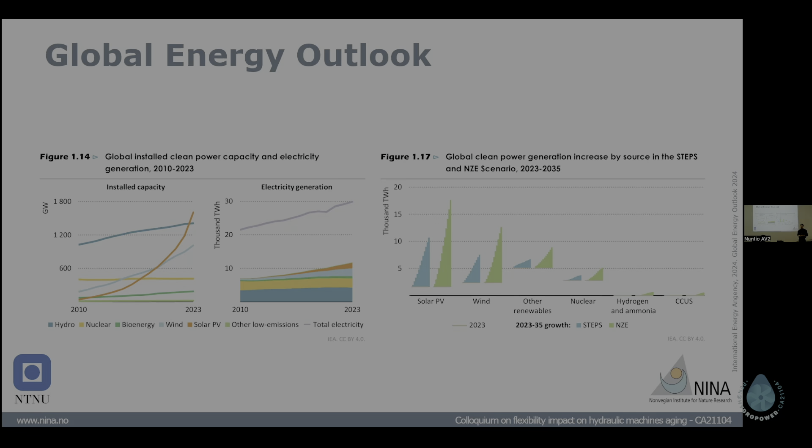I'm really happy to start off because, as a brief background, something that dropped this week is the Global Energy Outlook from the International Energy Agency, which shows that we still see a big increase in wind and solar photovoltaic. The installed capacity is just on the rise. We see that recently solar photovoltaic even overtook hydropower in terms of installed capacity. And we see that this trend will continue - what has been pledged by politicians shows a lot more capacity and energy generation from solar photovoltaic and wind energy in the next years.

That means we have a huge influx of intermittent energy sources, so we need something to stabilize the grid. That, of course, can be done using hydropower. And that just goes right to the point - we will see way more flexible use of hydropower in the upcoming years.

So just briefly about Norway - if you don't know, Norway is very favorable for hydropower. We have huge elevation differences, a lot of precipitation, and solid rock mass, so it's just very nice conditions for hydropower. If we look at the numbers, we see that we still have about 90% of the electricity being generated by hydropower. It used to be even higher, but now wind and solar are pushing the percentage down. Still, it's a large share, and those about 1,800 power plants are distributed across the entire country.

We see a huge number being installed on the west coast, which is even wetter, with annual precipitation reaching up to 2,000 millimeters annually. There's about 34 gigawatts installed capacity, producing about 137 terawatt hours of electricity annually. So this is big - it's the largest hydropower generating country in Europe.

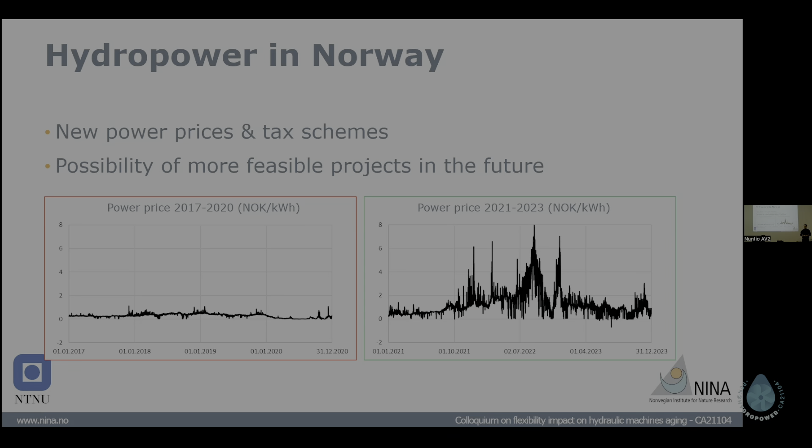You can predict, you can work with this, but you really know, okay, I get this or that power price over the next 10, 20, 30 years. But in recent years, there's been a huge change to that. We see that power prices are skyrocketing, and they are very fluctuating. That means that projects that might not have been economically feasible will be economically feasible in the future due to the increase in electricity prices. So this is interesting. A lot of things are changing on the market.

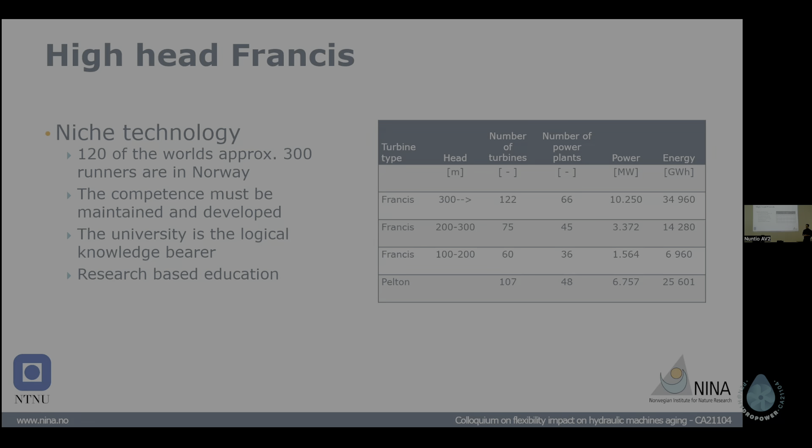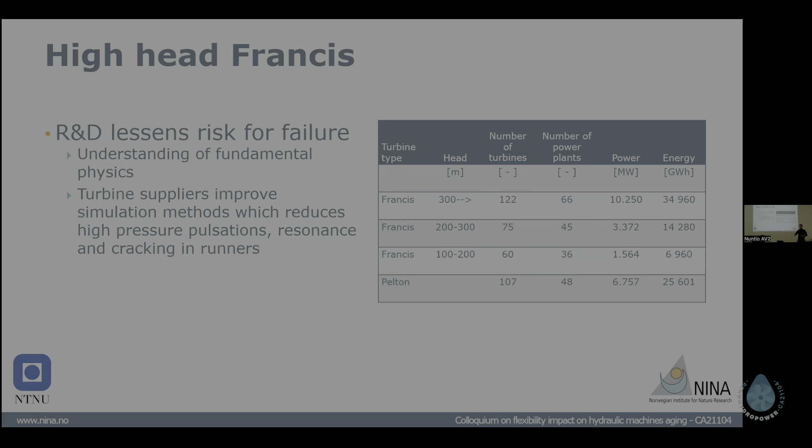And then again, if we approach a more flexible use, this will also mean there is a need for more research, and the research is usually done at the university. In Norway, that means the Norwegian University of Science and Technology in Trondheim, at the water power laboratory where we're sitting. Through this research and development, we can increase the knowledge on basics and physics, and also work together with manufacturers to reduce pressure pulsations, resonance, and cracking.

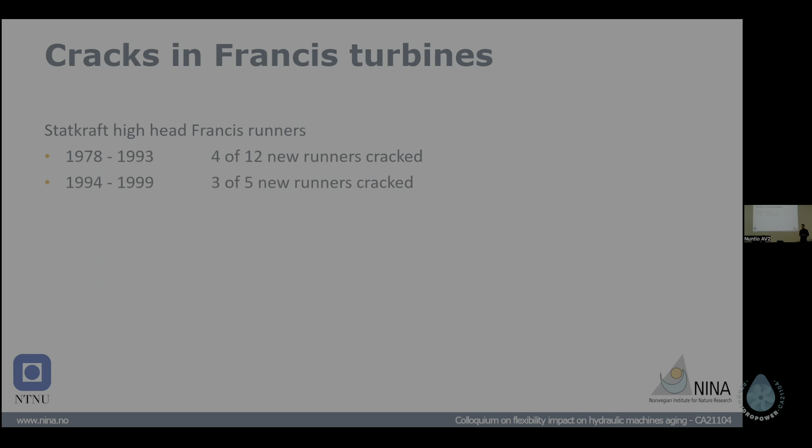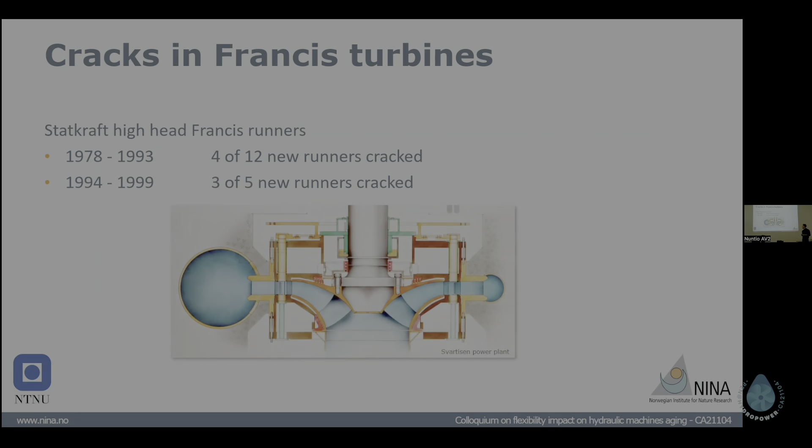And if I talk about cracking, there is some history in Norway that is of interest. If we have a look at cracks in turbine runners within the guarantee period, so within 2 years after installation, we see that's about 370 turbines that had cracks within this period prior to 2009 - little older numbers, but still we see most of those power plants are actually high-head Francis turbines. So that says something - there's some need to research why those occur.

It's also Statkraft, the biggest hydropower operator, that had huge problems. We see that they usually had a third of runners that cracked, and then it suddenly increased to 60%. So it's a huge increase. Statkraft had a huge interest in this research, especially the Svartisen power plant, where a crack occurred very close after installation of the runner, which pushed forward some research.

But we see that it's not only Statkraft, it's basically all the big operators that had problems with this, and it's also very big power plants that suffer. So there was, and there still is, a huge need for research, and this research was then conducted at the water power laboratory.

Simple reasons for this are, of course, rotor-stator interactions, which increase a lot if we have a look at high-head Francis turbines with a low specific speed number. So we see that, okay, we know the reason, but we want to know how to prevent it. And this is why the HiFrancis project came into place at the water power laboratory, where there was research conducted on a model turbine.

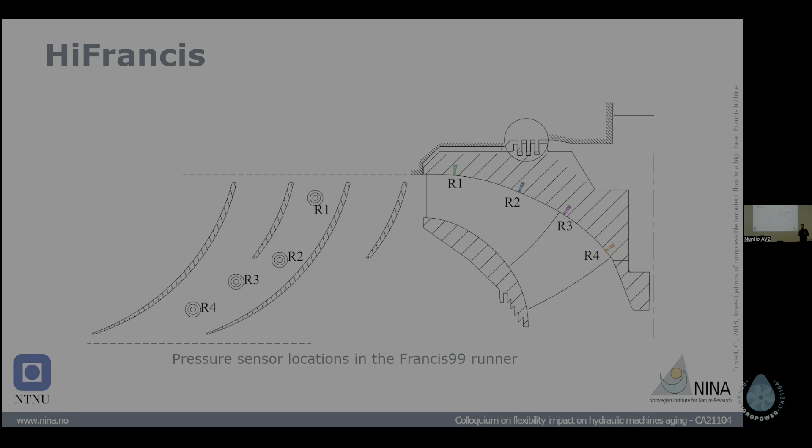This is a 1:5.1 model of a turbine installed at the Tokke power plant in Norway, consisting of 15 blades and 15 splitter blades. This was used to conduct onboard pressure measurements within the blade channel - 4 pressure sensors installed in the channel to have a look at what's actually going on within the runner, and then coupling this with flow simulations as well.

So what we see is, of course, we have dependency on the fluid load, which could be determined by experiments in the laboratory, and also proven by simulation. Same for the natural frequency of the runner, which is also important in the rotor-stator interactions. And then the last part that comes into play is hydrodynamic damping, where the structure itself, the flexibility of the structure, will lead to some decrease in the vortex shedding. Combining all this together, we get the actual structural response of the runner.

So what we got from this project is a guideline on how to design the runner, just considering all the different parts that will result in stresses on the runner, and then having a more accurate model of the runner before installation.

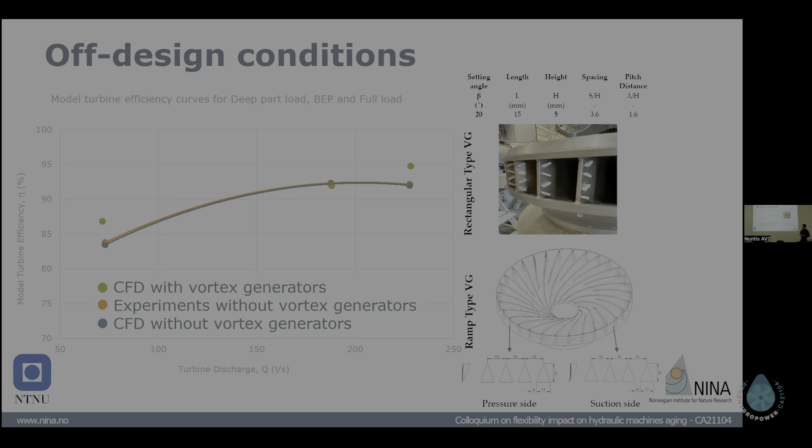Something that is also really nice to see is that we can investigate off-design conditions. Here we test vortex generators at the inlet of the runner, and what we see is the efficiency curve of the runner - at least from CFD studies, we can push the off-design conditions to better efficiency, which is very valuable if we have more operation not at the best efficiency point.

We'll also conduct experiments on that and see how that goes and if we can reproduce the results from CFD. But this is also something that is promising.

And then all of this goes into RenewHydro, which is a Center for Environmentally Friendly Energy Research. It was just this year approved with a long period from 25 to 33, and will go on under the supervision of NTNU and other research institutes both in Europe and internationally.

It will go on to a more holistic approach on hydropower research. So it will not only have a look at the classic hydropower branches - mechanical engineering, civil engineering, and electrical engineering - but it will also include environmental research and some economic studies. So it will be the entire view onto what hydropower makes up.

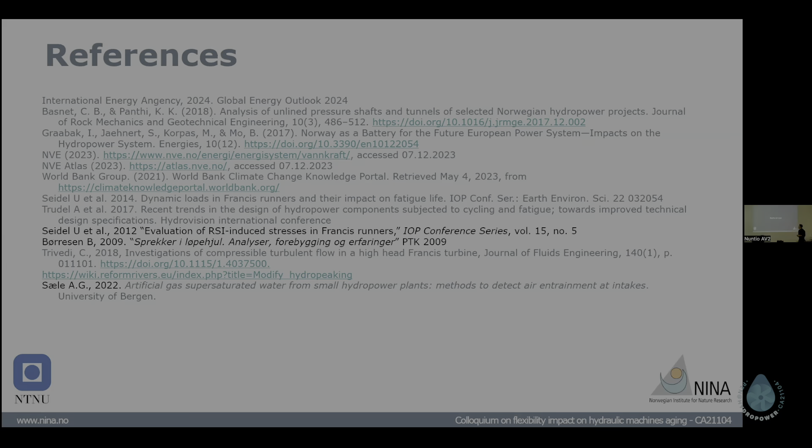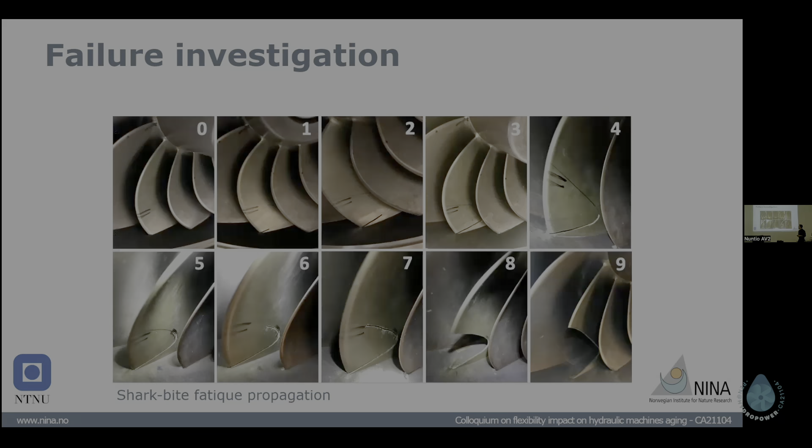Thank you for a very nice talk. I had a question about this plot you showed prior to 2009 concerning cracks in Francis turbines depending on the head. I had a question especially on this kind of cracks - are they detected because of regular maintenance, or are they really failures that appeared on the runner? Which kind of cracks are we talking about here?

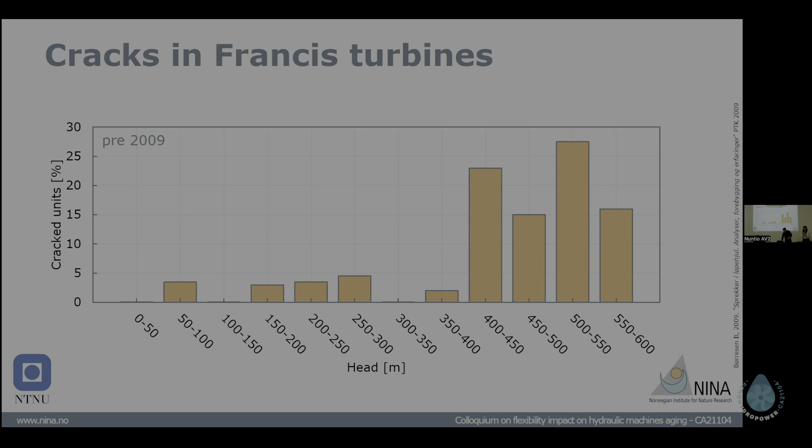I think that this is actually long term - cracks occurring in the 60s, 70s as well that were included. So I think since it's a large number of runners, this includes both total failure and just regular maintenance. I know from a case where there was regular maintenance and the power plant owners saw that a huge chunk of the blade was missing, some 40 centimeters long, and they just didn't detect it from regular operation.

Okay, so it is probably both. Both, yeah. Because I see 25% maybe cracks and failure, which is a big high number. Okay, thank you. Thank you very much.

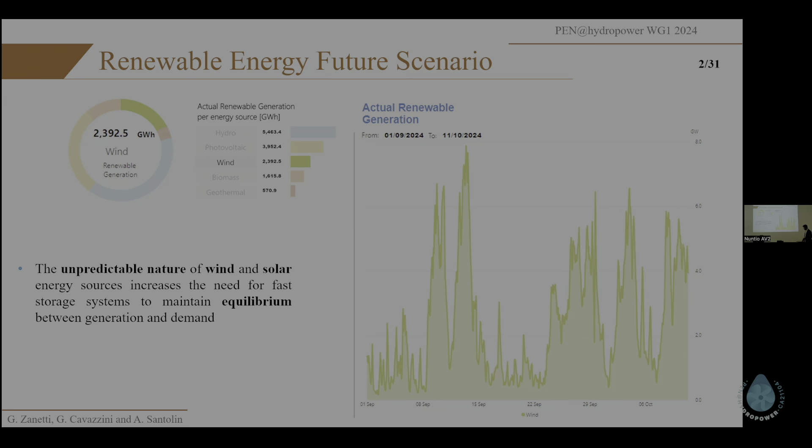So the longer time requirement for switching mode from pump into turbine mode and vice versa for pump turbines is affecting grid stability, by not providing the necessary power input or output in the grid, due to the spread of unpredictable energy sources.

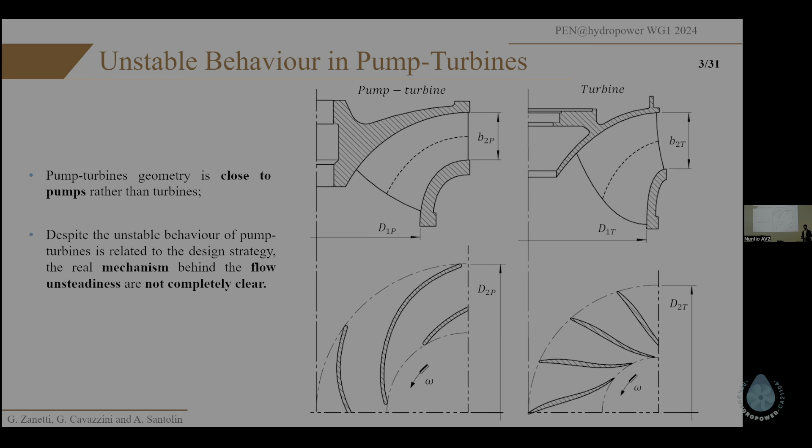When I say that pump turbines are designed preferring pumping mode, I mean the geometry of a pump turbine is almost the same as a pump. Here is a comparison between a Francis type runner and a pump turbine for the same specific speed. As you can see, pump turbine runners are characterized by a wider external diameter and smaller height of the channel at the inlet section. Francis type runners, on the contrary, are characterized by a reduced inlet diameter and a larger outlet diameter. Also the blades are quite different: pump turbines have very long blades in order to better guide the fluid in pumping mode.

We are sure that the unsteadiness is related to this specific geometry and condition. However, the correlation between all the geometrical features and the flow unsteadiness nowadays is not completely clear.

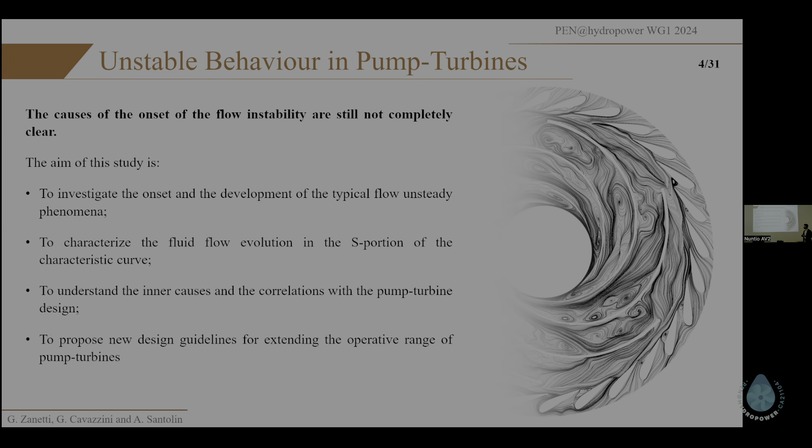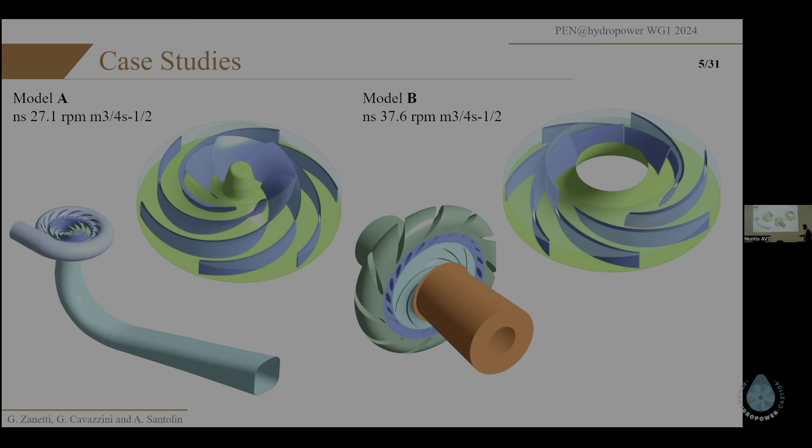The aim of our research was to investigate the unsteadiness in pump turbines by evaluating the flow evolution in the S portion of the characteristic curve, so in the turbine mode instability, in order to better understand the correlations between geometry and turbulent structure, and hopefully propose new guidelines or design strategies for improving not the efficiency, because currently we do not have a problem with the efficiency of pump turbines, but to enlarge the operative range and reduce the switching time requirement.

We performed two different numerical campaigns on two different runners, named Model A and Model B. The first one is actually the runner coming from the test rig of the Norwegian Hydropower Center, so it's the same test rig as in the previous presentation, but with a different runner, which was adapted to feature a reversible pump turbine.

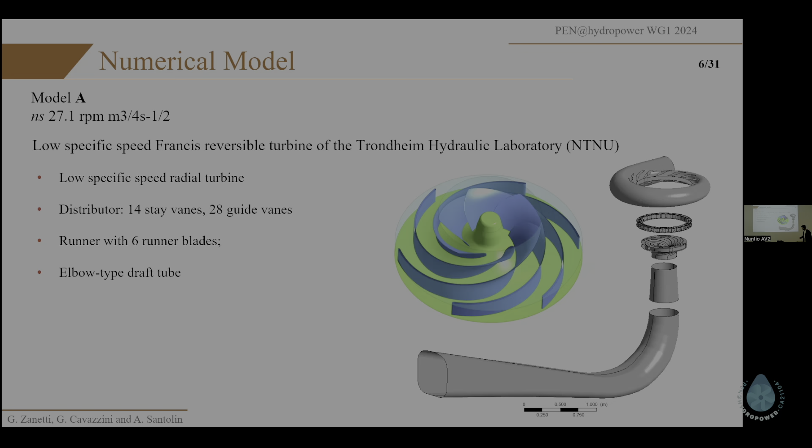Just a few words regarding this hydraulic machine: it's a standard type pump turbine with the spiral case, guide vanes, and elbow type draft tube. The runner is also quite standard. The only important thing to mention is that this is a machine with a very, very low specific speed value, which you can appreciate in the envelope angle of the blades. Blades are extremely long to better guide the fluid.

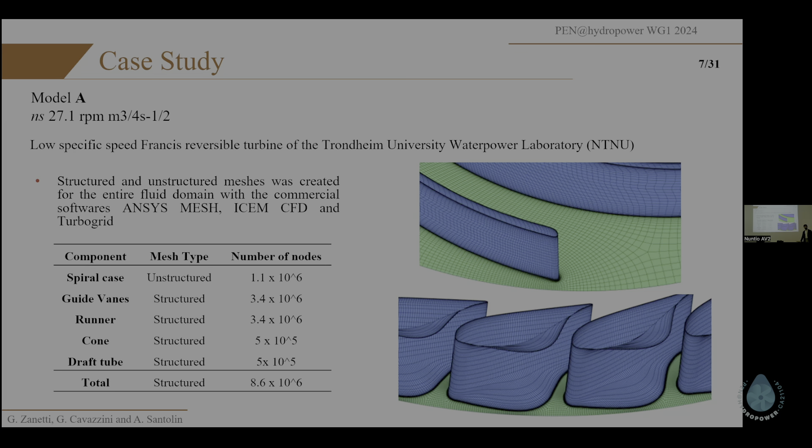A few words regarding the model: we decided to adopt structured and unstructured meshes. In detail, unstructured for the spiral case featuring the stay vanes because of the relative complexity of the geometry, while structured meshes were adopted for the other subdomains. We didn't include the front and rear leakage channels in order to reduce the numerical model. Here we have just a few pictures regarding the mesh in the spiral, the guide vanes, and the runner.

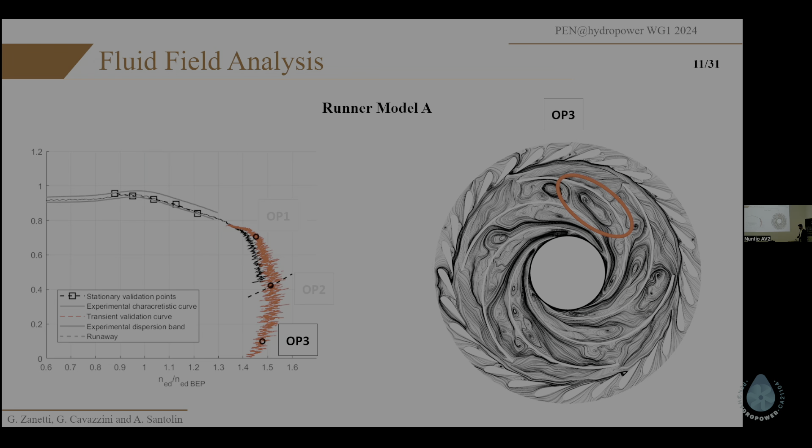It's no longer aligned with the blades, both in the runner and in the guide vanes, with the onset of very large recirculations and the presence of very large interblade vortexes that are completely choking the channels. In front of the choked channels, you can see that water is pushed back into the guide vanes, so the rotor-stator interaction modified the flow distribution also in the guide vanes.

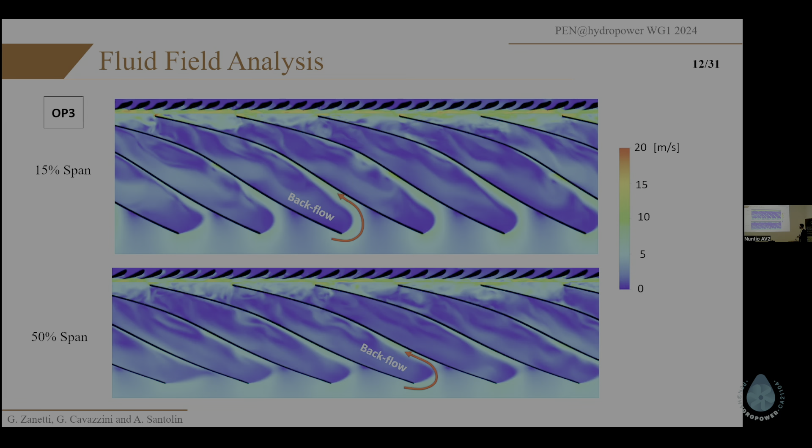To better appreciate the structure of these interblade vortexes, here I've reported the velocity field evaluated at the normalized mid-span section of the runner and at 15% span, close to the hub. You can clearly see flow going back from the outlet section of the runner into the channels, generating these large secondary vortexes. I've shown this in two different span-wise sections to demonstrate the three-dimensional nature of this phenomenon - it's slightly visible at mid-span, and very clear at 15% span, close to the hub.

To further demonstrate the evolution in space of this turbulent structure, here I've reported a schematization of this specific turbulent feature. This is the three-dimensional view of the interblade vortexes in the runaway condition - you can clearly see there is a blockage effect on the flow. And here is the schematization.

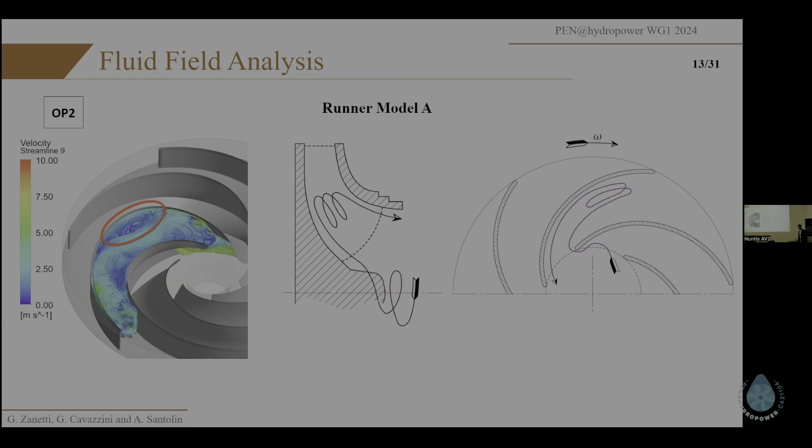So the flow is actually going backward from the outlet section. It spins with the runner, dragged by the runner's rotation, then goes into the channels toward the shroud, and exits close to the runner shroud sections. This is a very dissipative motion, so there's a lot of energy consumed because of this.

What's really interesting is the effect of these vortexes. The main effect of the development of this large structure is an imbalance in the discharge distribution in the runner, leading to the onset of very sharp force pulsations starting from around 15% of the best efficiency discharge.

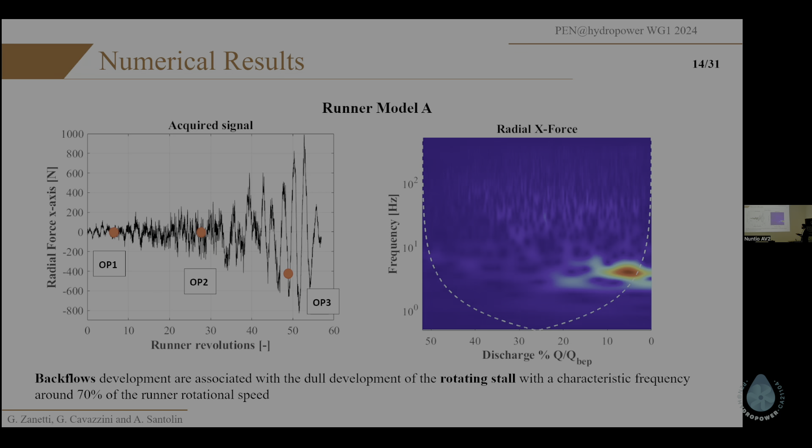Here you have the trend of the radial x-direction force during the simulation, and here the wavelet analysis of the same signal. Starting from more or less 15% of the best efficiency discharge, we have the onset of this very high amplitude structured instability with a specific frequency, in this case around 70% of the runner rotational speed. This behavior is linked to the development and consolidation of the rotating stall - a quite common feature of pump turbines operating in the turbine brake area.

You can also appreciate the rise in the magnitude of the forces, so in a real case the vibrations, by taking a look at the amplitude difference between the turbine brake area and at partial load. There's like a factor of 10 in the radial forces.

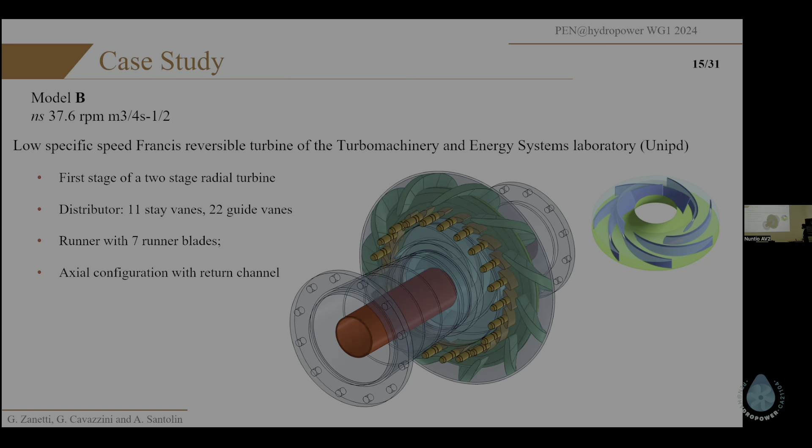In order to confirm these results and investigate if this was only related to this specific geometry, we decided to extend this analysis by simulating another pump turbine - this one from the Turbomachinery and Energy Systems Laboratory of the University of Padua. It's a quite different configuration, the first stage of a double stage pump turbine without a spiral case - instead there is a bladed return channel. Another difference is it does not have an elbow type draft tube, but rather a straight type with a pipe inside for the shaft of the machine.

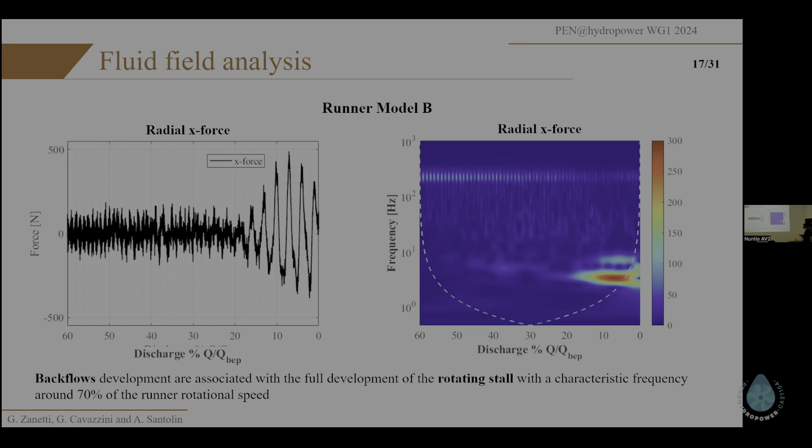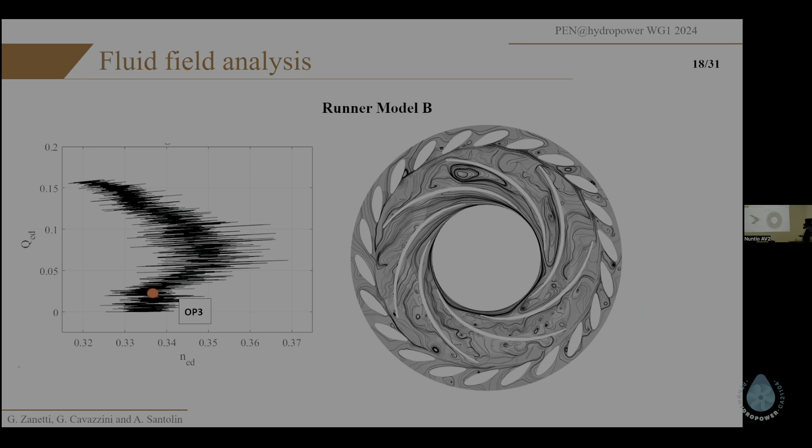Passing to the results, here you have, as in the previous case, the trend of the radial forces acting on the runner in the x direction, together with the time-frequency characterization. You can clearly see a very close behavior, with the onset of a structured high amplitude perturbation starting also in this case from around 15% of the best efficiency discharge. To better appreciate the common feature between the two runners, here is the flow field evaluated also in this case in the turbine brake area - you can see there is still the presence of very large interblade vortexes.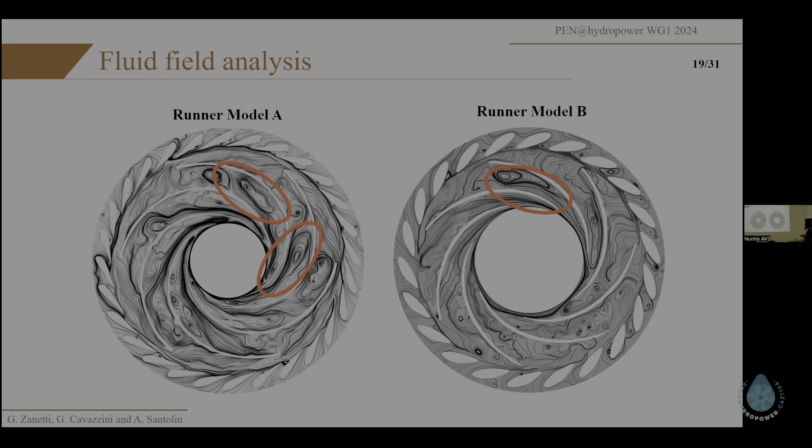Taking a look at the comparison between Model A and Model B runner, we can see that the flow is characterized by a common behavior. In runner Model A, we have the presence of large vortexes. We have a very similar behavior in runner Model B, though in this case the Model B runner is characterized by a single, very large vortex, while in runner Model A there are more vortexes affecting the flow. Also in the guide vanes, we have a very close behavior with the rotor-stator interaction causing backflows of the discharge.

Finally, to really show you the common feature, I reported here the results of the wavelet analysis performed on the torque acting on a single runner blade. You can clearly see that the spectrum is quite similar between the two simulated machines.

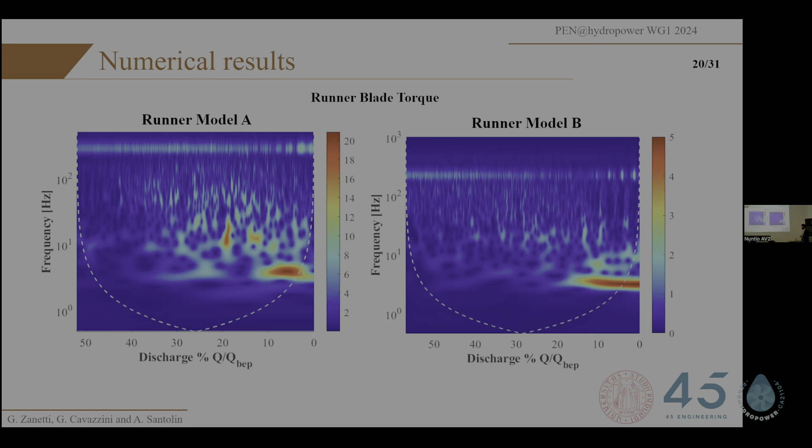Starting from 15% of the best efficiency discharge, we have the onset of these really high amplitude perturbations. It's also quite interesting to notice that the frequency is also almost the same, around 17% of the rotational speed of the runner. This is due to the presence of the rotating stall affecting the runner, rotating at the subsynchronous speed of the runner speed. So what are the results of this first analysis?

This slope variation of the characteristic curve influences the pressure and torque pulsation of the machine, and the development of the flow unsteadiness has to be found in the development of the rotating stall. So the rotating stall dominates the fluid dynamics of the machine when operating below runaway, in the turbine brake area.

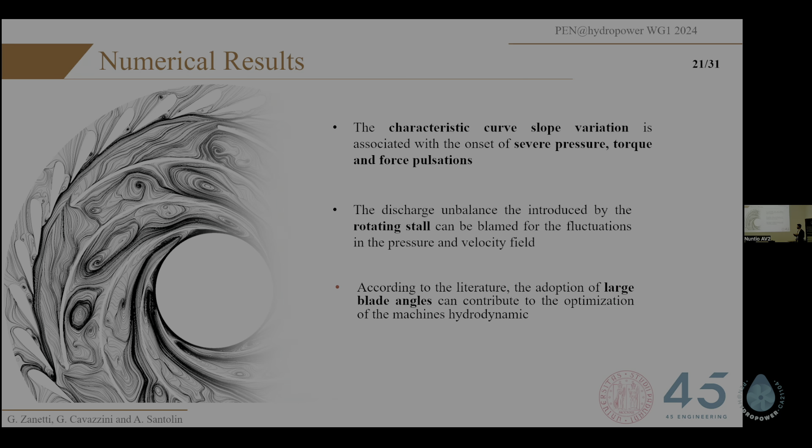Later on, after a literature study, we found that some authors investigated the adoption of the blade's lean angle for improving efficiency in turbine and pump mode, and also to enlarge the operative ranges. Nevertheless, there were at the time insufficient studies deeply investigating the relation between the lean angle and the flow unsteadiness.

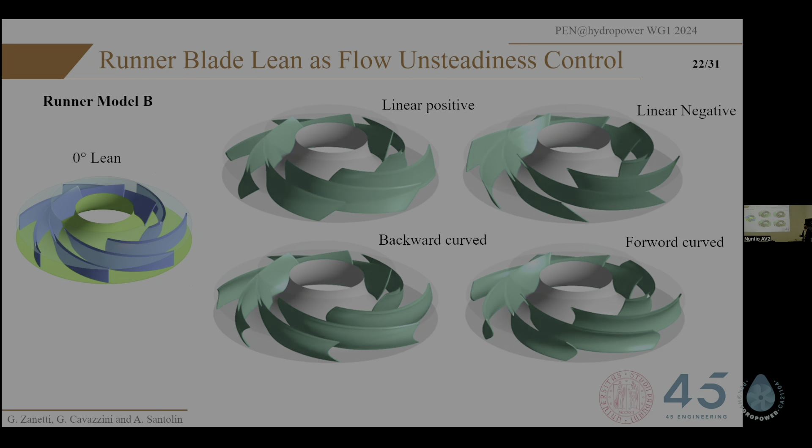So we decided to propose a comparative analysis by extending the previous simulation to four other runner configurations. We modified the runner by changing the lean angle and simulated two runners with linear lean angle, one positive and one negative, and two others with curved lean angle, forward and backward.

For those not confident with this topic, lean angle is a very common feature adopted in pumps in order to suppress secondary flows. This allows you to modify the pressure distribution at the runner impeller outlet section, and so to guarantee a better distribution of the flow streamlines in this section.

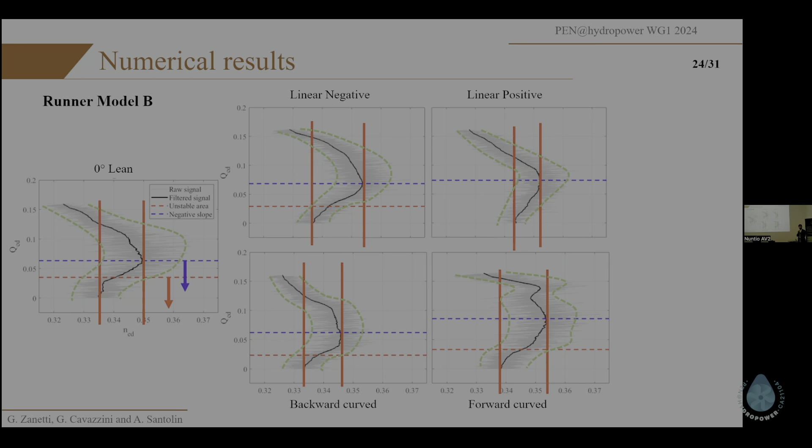First, we can take a look at the dispersion band of the curves. The amplitude, the width of this dispersion band, is a tool to measure the pressure pulsation at the inlet section of the machine, so the water head. Secondly, we can look at the overlap region of the characteristic curve, the width of the S portion of the curve.

We can see that the runner characterized by the linear positive angle presents reduced amplitude of the S portion.

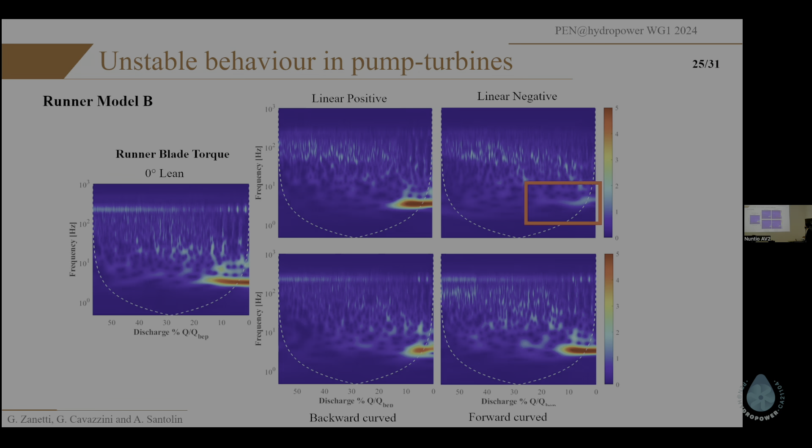Later on, moving to the analysis of the runner blade torque, this is the same as in the previous case, the wavelet analysis performed on a single runner blade. We can see that this specific model does not show the presence of the previously mentioned low frequency instability. Actually, we can see that there is still a very small amplitude structured phenomena.

However, in comparison with the other geometries, we can appreciate that this specific condition is characterized by a reduced influence on the development of the rotating stall.

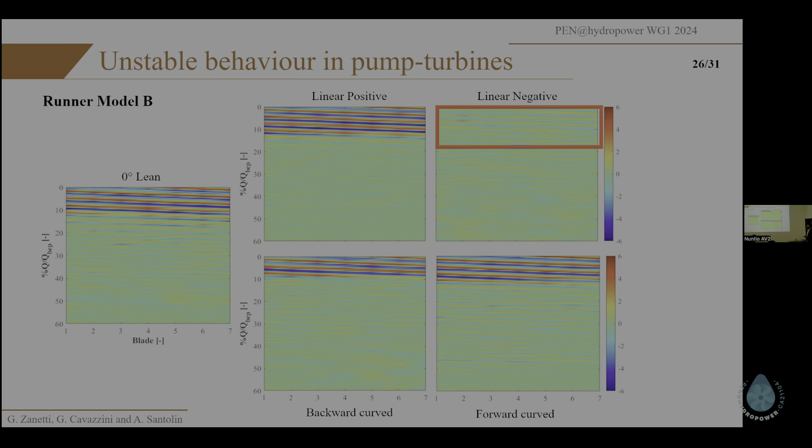To better appreciate this aspect, I reported here the trend of the torque acting on all the runner blades. Here we have the blade numbers, 1 to 7, and here we have the discharge over time. You can see that starting from 12-15% of the best efficiency discharge, the torque on the blades is characterized by the onset of this structured perturbation.

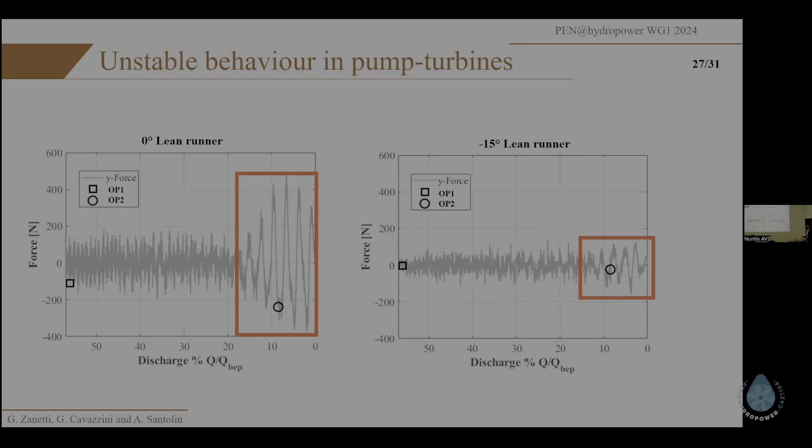A further demonstration of the reduced sensitivity to this phenomenon: here we have reported the comparison between the radial force for the original runner and the improved one. You can see there is still structured unsteadiness at partial load, in the turbine brake area, but the amplitude is extremely lower compared to the original runner.

Now, to see how the development of backflows and rotating stall affects the force distribution in the runner, here I reported the trend of the static pressure and the streamline evaluated at the 20% span of the 0-degree runner, so the original runner, and later of the improved one. As you can see,

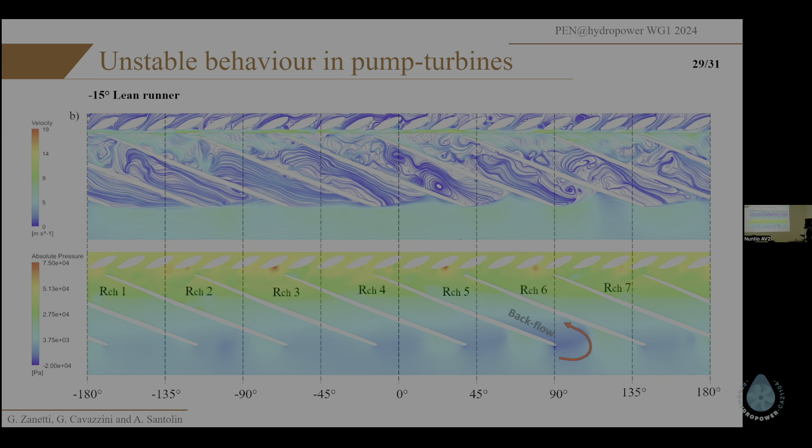pressure in the guide vanes and also in the runner inlet section. On the contrary, this is the runner with the negative lean angle. We can see that we still have backflows affecting the channels. It's visible in the pressure field, but also in the velocity streamline. Nevertheless, you can see that the distribution of the pressure in the guide vane is way more homogeneous.

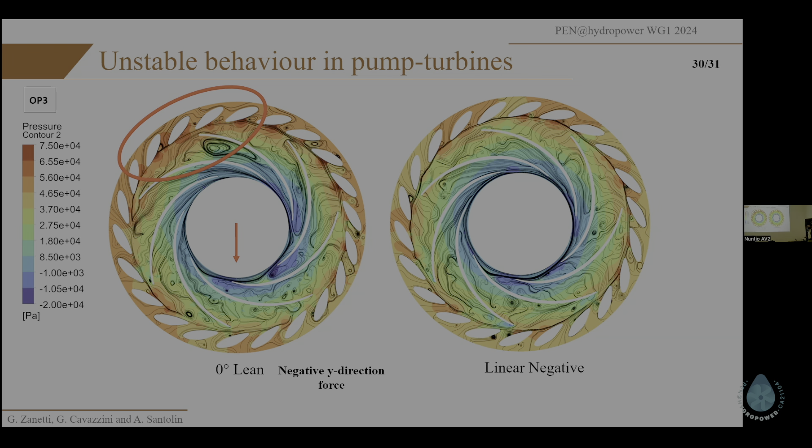In this specific time instant, it is clear to understand why there is a downforce, because the pressure distribution in the top section of the runner is higher compared to the lower one, and that's why in this specific time instant you have a negative force pushing down the runner.

On the contrary, you can see that this specific configuration is still affected by a very perturbated fluid flow, but with a quite homogeneous pressure distribution in the guide vanes.

So, what's the conclusion? Flow unsteadiness in pump turbines still represents a key challenge in the development of new pumped hydro storage facilities and in the development of technologies for allowing the distribution and the widespread of renewable energy sources.

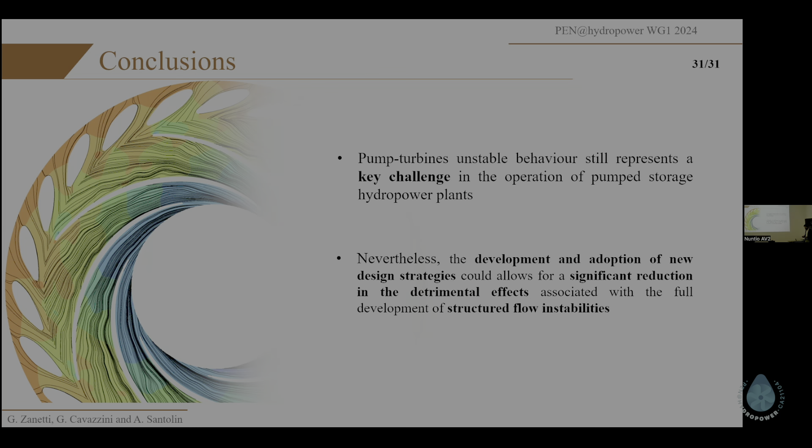Nevertheless, these results demonstrate that we still have margin to improve, not the efficiency, but the operative condition of pump turbines. So there's margin to propose new design guidelines and new hydraulic modifications in order to extend the operative ranges of pump turbines and to increase the flexibility. And with this, I would like to thank you for your attention.

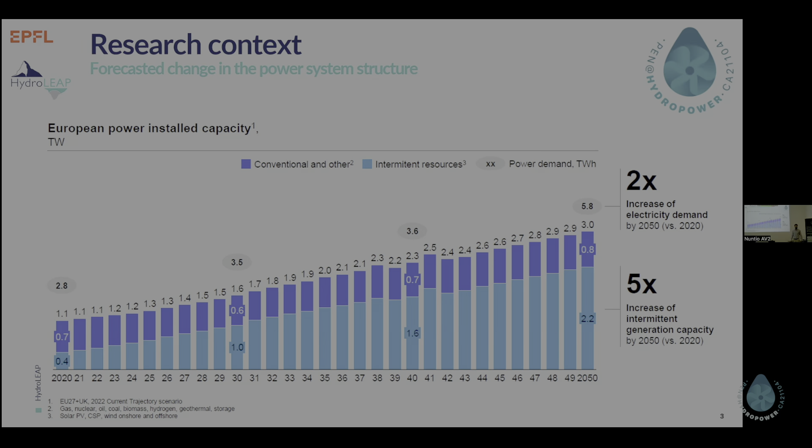All this work is framed within the HydroLeap project, a research project funded by the Swiss Federal Office of Energy. As my colleagues Ludwig and Giacomo already introduced, I won't dwell on context, but basically we are seeing forecasted increases in electricity demand over the next decades, and in the specific case of the European power system, a very important fraction of this demand is planned to be covered by renewable sources, most of which are intermittent, introducing stochastic production into the power system.

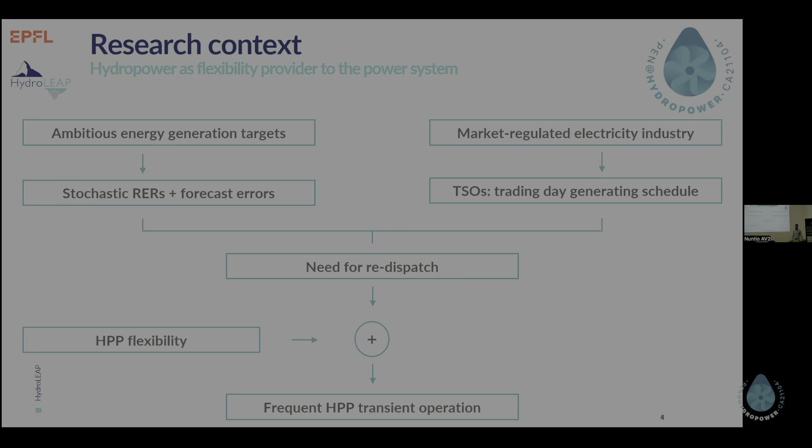In parallel to these ambitious energy targets, this research also relies on another issue the electricity industry is currently facing, namely the structure of the electricity industry, which is nowadays regulated around markets. One consequence of the coupling between these two elements is that TSOs nowadays are required to adjust their generating schedule, introducing so-called redispatch measures.

Hydropower plants, due to their very flexible nature, are very well suited to provide this flexibility to the power grid. But this has a cost: hydropower plants are undergoing more and more frequently transient operating conditions, such as startups or shutdowns.

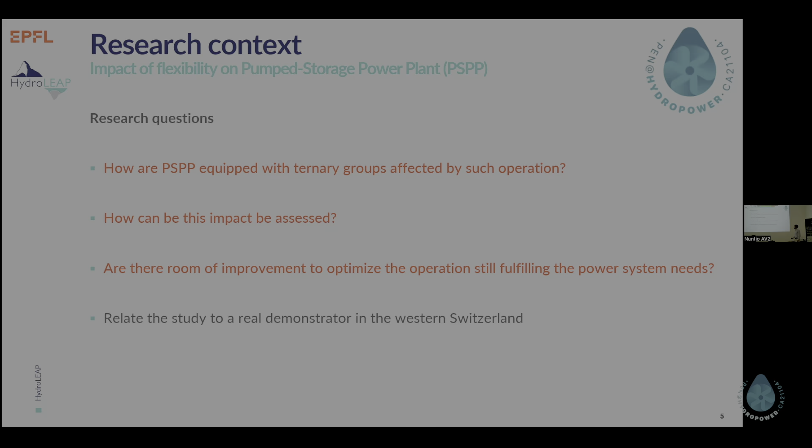With this in mind, there are basically three main research questions that arise in the particular case of pumped storage power plants: how are pumped storage power plants equipped with ternary groups affected by the impact of this operation, how can this be assessed if possible, and finally, are there opportunities to optimize the operation while still fulfilling the requirements of the power system.

We will investigate all three research questions in relation to a real demonstrator located in Western Switzerland, which we'll see later on.

Before diving into the methodology, we'll quickly introduce what fatigue is and how it applies here. Fatigue is the detrimental phenomenon that happens when a solid structure is loaded with cyclic loading. It's typically evaluated experimentally, since we have to bring materials to failure.

To evaluate the damage in terms of lifetime reduction for our structure, we use a damage rate, which considers that each cycle of our loading provides a single contribution, and these contributions can be summed up to obtain a total damage rate. When this rate reaches the value of 1, at least statistically, our structure will fail.

In parallel to this, the most well-known approach in terms of fatigue, we also have another approach which takes into account more specifically the physics of the problem, namely the investigation of the physics of crack propagation inside solid bodies.

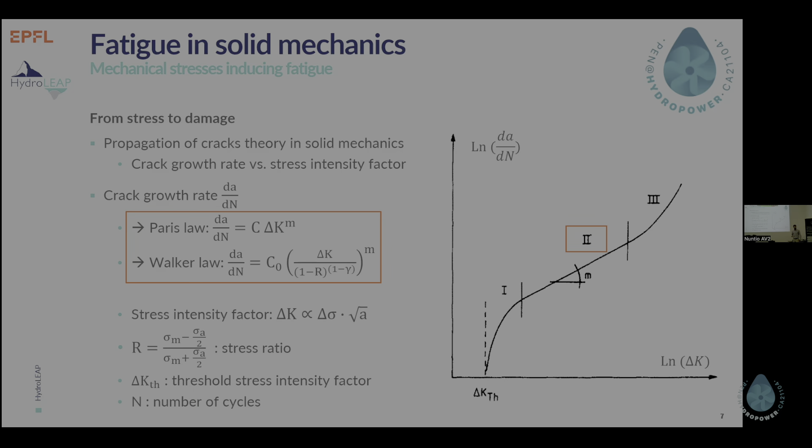We can split this propagation trend into three main regions. The most common model we have, the Paris law, basically describes the second stage, because the structure spends the vast majority of its lifetime in this second stage, not in the incipient stage or when it goes to failure.

But for us, it's also interesting to investigate another model: the Walker law, since we are also interested in the stress ratio, taking into account not only the stress amplitude but also the average value of the stresses around which our cyclic loading is happening, that is, when the cyclic loading is not happening around zero stress.

Regarding hydraulic machines, I will cover a bit the phenomena that are happening. In terms of centrifugal pumps, I will go very quickly.

Our colleagues already introduced the most common phenomena for centrifugal pumps, basically rotor-stator interaction and rotating stall, but we can also have phenomena such as recirculation, separation, or cavitation that are responsible for inducing important dynamic loads on the structure. Also from the point of view of mechanical imbalances, we can have some important loading on it.

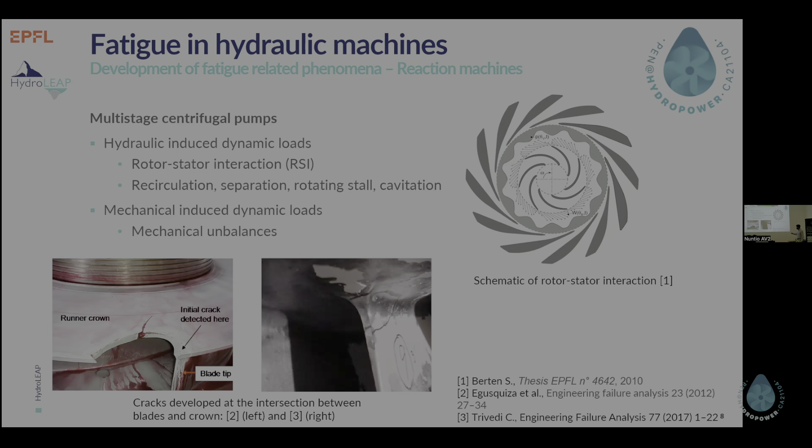Here you can see a schematic of the rotor-stator interaction, whereas here we can see two different examples of cracks and failure for reaction machines. I'm not sure, I think this is a pump turbine, whereas this is a Francis turbine, but the principle stays the same, with the hotspot location in terms of stresses being basically the intersection between the blade and the crown.

Regarding Pelton turbines, the situation is pretty different. The main excitation for the dynamic loads is the water jet that impinges on the buckets. Here we have an important stressor that develops at the bucket roots, since we are exciting the bending mode of the bucket. As we can see here, our main point of interest is the bucket root.

We can also have potential dynamic amplification due to interaction with the modal behavior. So it's interesting to also investigate the modal behavior of the runner to try to catch the possibility of this excitation. The aim of the project is to investigate experimentally and assess how important this impact is for these hydraulic machines.

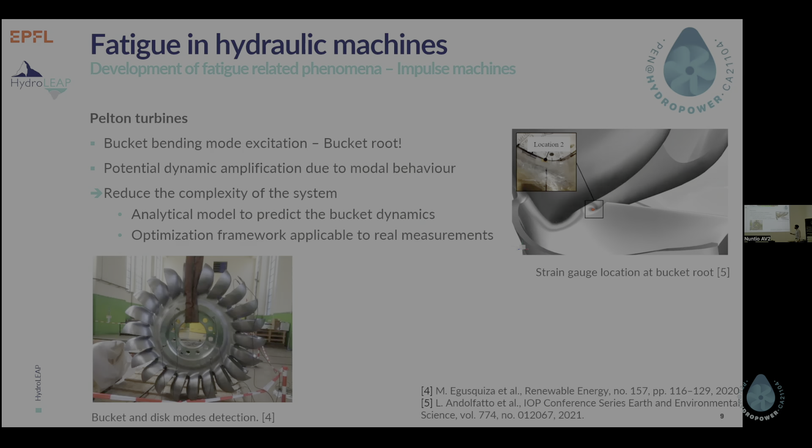But we noticed that given the simpler nature in terms of geometry and excitation for the Pelton turbine, this led us to the idea of trying to develop an analytical model, not only assessing experimentally for the Pelton turbines, but also trying to forecast the stresses and therefore also the impact on the fatigue lifetime.

So the idea was to reduce the complexity of the system and try to build this analytical model, both to evaluate and predict the bucket dynamics, and also to try to build an optimization framework to be later applicable on real measurements. So that's what we did.

The idea was to isolate from a Pelton turbine, isolate the system of interest - in our case the bucket - and try to express the excitation on it. Basically the centrifugal force, which is acting radially on the runner, and the jet force, which is acting tangentially. And to reduce this structure to a simple one, in this case a cantilever beam, which is basically the schematic of our bucket.

The idea was to express the excitation terms of centrifugal force and jet force via Fourier analysis, to be able to extract the dynamic response of the displacement of our structure - basically having the analytical expression of the displacement. And with this, the steps from the displacement to the stress at the intersection here, at the bucket root, is pretty straightforward.

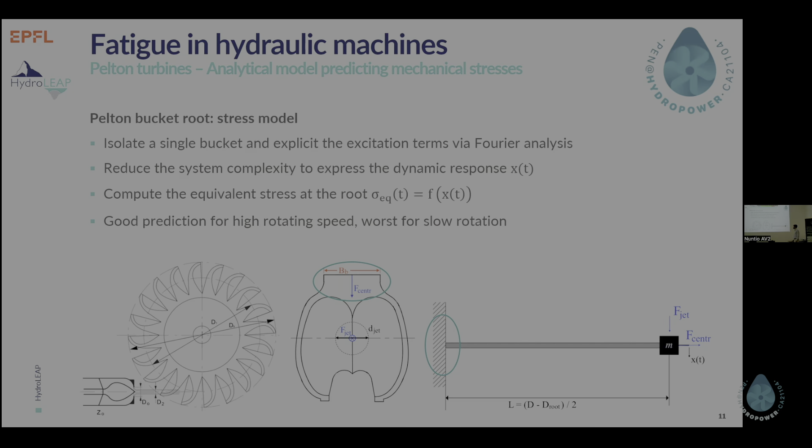We noticed afterwards, when we also had stress measurements, that we have a quite good prediction for high rotating speed, whereas for slow rotation the prediction was quite bad, due to the inherent nature of Fourier analysis, which is based on steady state and periodic nature. When we have slow rotation, of course, we have damping of the bucket, which is very important - we have transient effects that we didn't take into account with our Fourier analysis.

So the step from the forecast of the stresses to the fatigue could be pretty straightforward, but we noticed that with the two methodologies I showed you before, we have a few kinds of problems. These methodologies rely on counting cycle algorithms to count the cycles of the loading, and also present thresholds in stress amplitude to calculate the fatigue impact, and are described by power laws.

And when dealing with stress estimation, not measurement, even with small errors, we can end up with a potential order of magnitude difference in the damage. So the idea was to try to have a representation of our damage, but trying to not be too wrong, to have a first idea of how the damage can evolve.

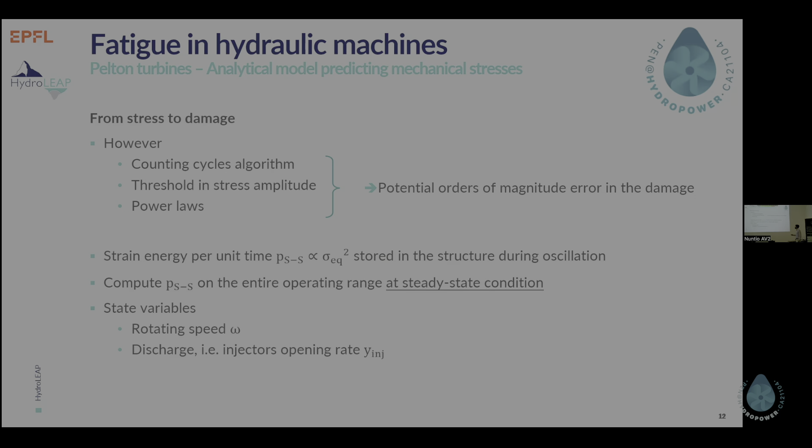So what we did was take an alternative approach, basically calculating the energy of the signal for every operating condition that we calculate. This is essentially the strain energy which is stored in the oscillation of the bucket. So we used this quantity to evaluate our damage, and we calculated it across the entire operating range of our Pelton turbine at steady state conditions.

So with our operating range discretized regarding rotating speed, omega, and the discharge - so for the Pelton turbine, the opening rate of the injectors.

And in parallel to this, so not only to try to give an estimation of the fatigue, but we also try to build up an optimization framework. And for Pelton turbines in ternary groups, one

operation which is pretty relevant is the back-to-back startup. So basically when with your generating units, you're putting in rotation the pumping units to bring it to synchronization. And it is pretty interesting from the point of view of dynamic loads, because we have high mechanical torque. We are not putting in movement only the turbine, but also all the multi-stage pump. And we also have an influence of the pump rated power. So this depends on both sides.

So the aim of this step was trying to minimize the damage which is accumulated during the acceleration on the Pelton turbine, making the hypothesis that we can get the damage from the steady state damage that we calculated before. So the idea of our optimization problem was to define an objective function, which is basically the sum of the damage for each dt, of each time step of our acceleration.

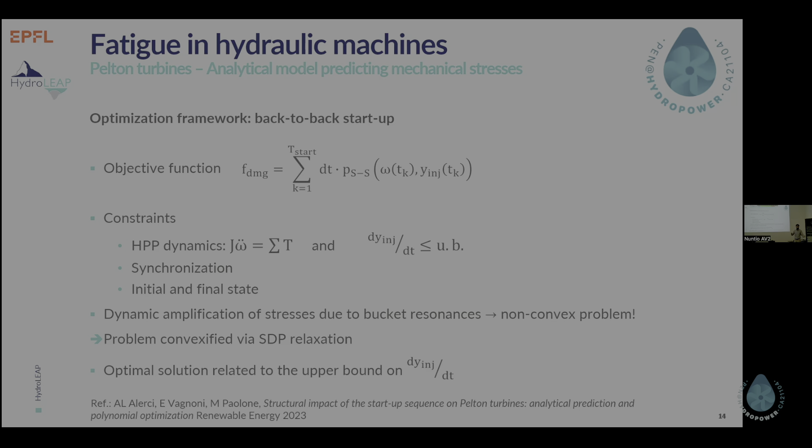And so we ended up with a non-convex problem in reason of the interaction between our operating condition with the resonance modes of the bucket. And the problem with this is that you cannot solve it with simple gradient descent-based algorithm. So we need to relax our problem and make it convex, and we did it with semi-definite relaxation. So we'll not plot all the solutions that we had, but basically the optimal global solution was strongly dependent on this factor, so on the upper bound that we put on the main reactivity of our injector opening rate.

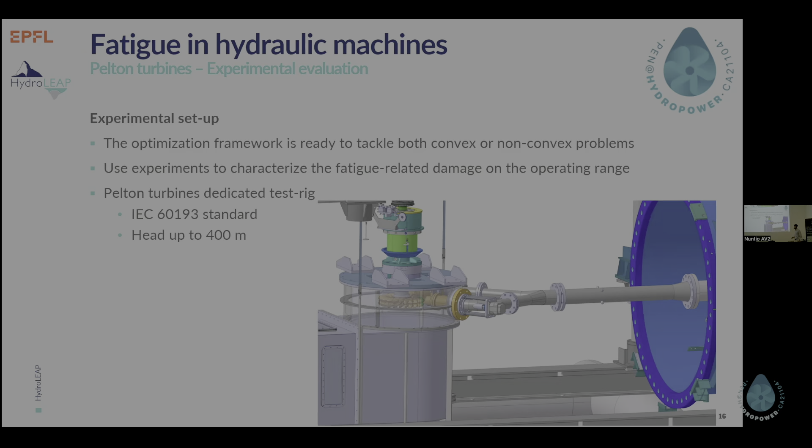Now we have a model that we can handle with convex and non-convex problems in terms of an optimization. So it's now the moment to go to the experimental assessment and try also in this case to both evaluate and optimize the operation of our Pelton turbine.

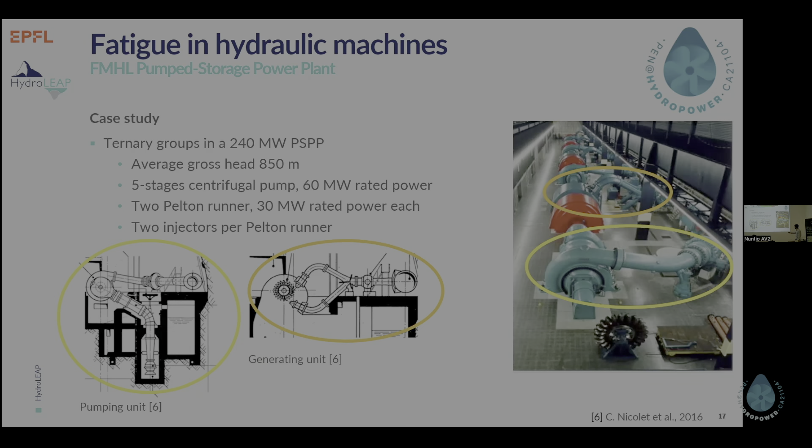So in our lab we can test Pelton turbine in a dedicated test rig, which is conforming to the IEC standard that can reach until 400 meters of head. And the reduced scale model that we tested is basically the same geometry according to the pumped storage power plant that I told you before. So it is a 240 megawatt pumped storage power plant with a gross head of about between 800 and 900 meters.

And we have 4 units. Each one with a 5-stage centrifugal pump that you can see here in the photo and here in the schematic. And each unit has a generating unit, which is represented by 2 Pelton runners that you can see here with the 2 sets of the distributors. With a reduced scale ratio of about 5 times, this translates to a net head of about 168 meters.

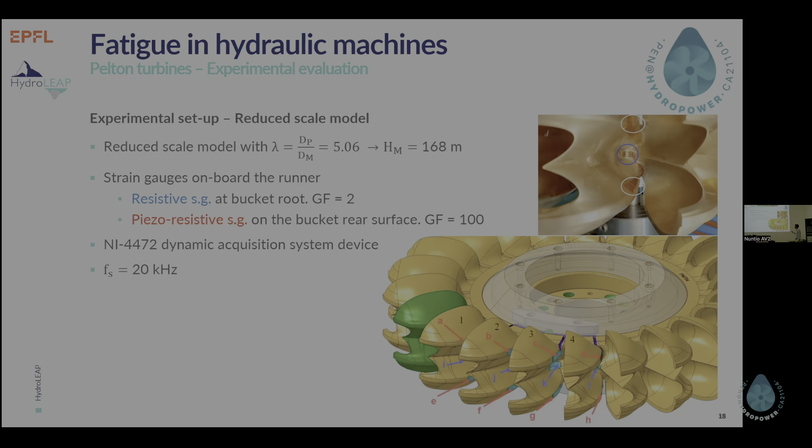And we implemented our reduced scale model with strain gauges on board the runner. So we used both resistive strain gauges at the bucket root that you can see here in the photo, here in the 3D model, and also piezoresistive strain gauges on the rear surface of the bucket. You can recognize it here a bit and here indicated by the red letters. Of course, in the end, we ended up with 12 sensors, but here what I show you is concerning only one resistive strain gauge in reason of the location, which is the hotspot, as we saw before.

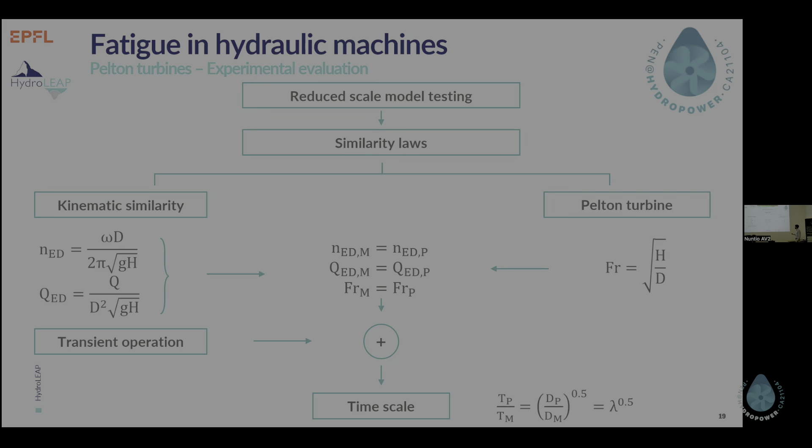In terms of similarity, during our test we try to fulfill kinematic similarity, which is represented by speed factor and discharge factor, and also the Froude similarity, which is a strong requirement when testing Pelton turbines in reason of the multi-phase flow that develops in the casing. And trying to keep those three terms equal between a reduced scale model and the real scale prototype allowed us to fulfill the velocity triangle similarity and the hydraulic condition.

Moreover, when talking about transient operation, those similarities also have an impact on the time scale, so on the length of our sequence that we are testing, which ended up with a ratio between the time of the prototype and the model scale, which is a function of the geometrical scale ratio.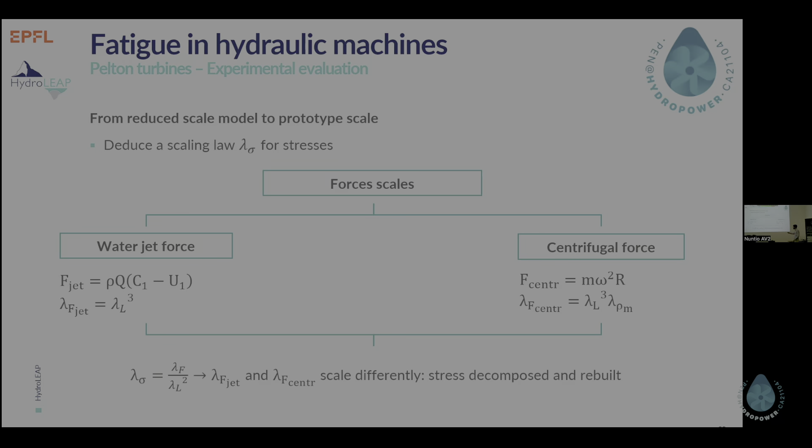We also tried to extract a scaling law for the stresses, so considering the two sources of dynamic loads, in this case the force of the jet and the centrifugal force, we ended up with two different scales. And this could be a problem because to try having the stresses for the prototype scale signal, we had to basically split the signal that we had on the reduced scale model and then rebuild it up according to the two different scales.

So now it's time to move to the evaluation of the fatigue phenomena, and in this case I will focus on the crack propagation approach due to time constraints. Basically, when we have our stress measurements, we apply the counting cycle algorithm, which provides us the number of cycles with a specific stress amplitude and stress average value.

Integrating the Walker law that I showed you before allowed us to express the crack length after a specific time step dt, as a function of the crack length before the time step dt, plus a summing term which is a function of the stress amplitudes and different material parameters—basically the output of our counting algorithm.

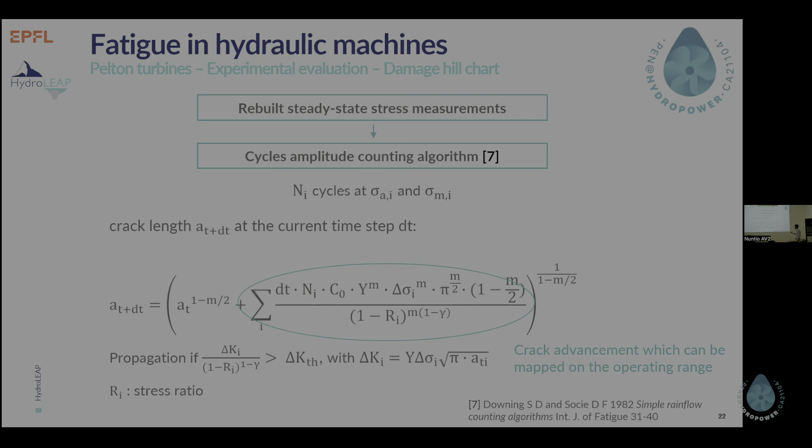Here we don't have an explicit dependence on the crack length, but the crack length affects the terms inside, because depending on the stress intensity factor, which includes the crack length, we can or cannot cross a certain threshold in the propagation terms. This means that for each crack length we currently have, we will have a different damage.

The damage can be represented by this term, which we can assume as the crack advancement for each time step, and it can be plotted. Here we see this term plotted for a current crack length of 1.7 millimeters. Of course we have to make some hypothesis on the current crack length in our solids, where we have our strain gauges transposed to the prototype scale, plotted as a function of the rotating speed and the injector.

And for example, we have another case—exactly the same situation, but with a crack length of 2.3 millimeters.

The idea was: we have plotted our damage hill chart, and now we try, as before, to implement an optimization algorithm, always considering back-to-back startup of the multi-stage pump performed with the Pelton turbine, with our initial condition being the standstill point, and the target point for the Pelton turbine dictated by the rated power needed to put our multi-stage pump in movement, and also for the best efficiency point.

We can see the position of the conditions are pretty much the same, but the damage we have for this condition is not the same. So the idea is to apply the same optimization principle as before, but this time the objective function we're trying to minimize is the crack length at the end of the acceleration.

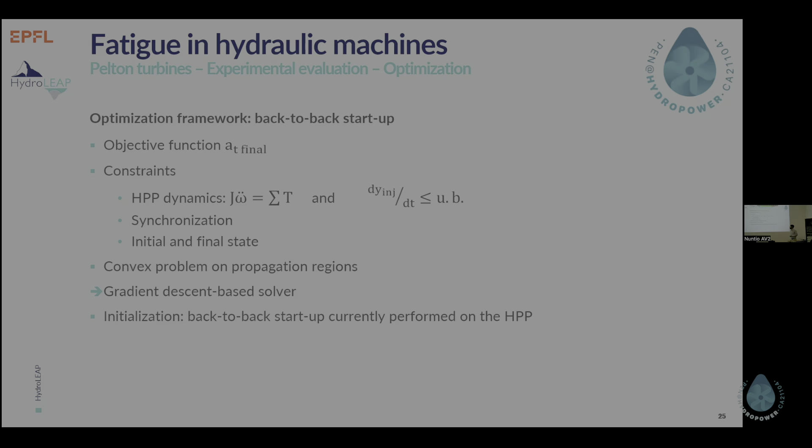In this case, we need an initialization, an initial solution, and we use the back-to-back startup currently performed on the hydropower plant, also to be able to compare our optimal solution. We obtained this optimal solution for each different scenario depending on the crack length, and tried to implement these sequences on our test rig.

So we performed our transient experimental campaign and collected the signal from it, and we ended up with these results. For different cases of crack length, we had an optimal solution compared with the baseline solution. We see that for the vast majority of cases, especially when crossing a certain threshold in crack length, we are able to optimize, so to reduce the length of our crack.

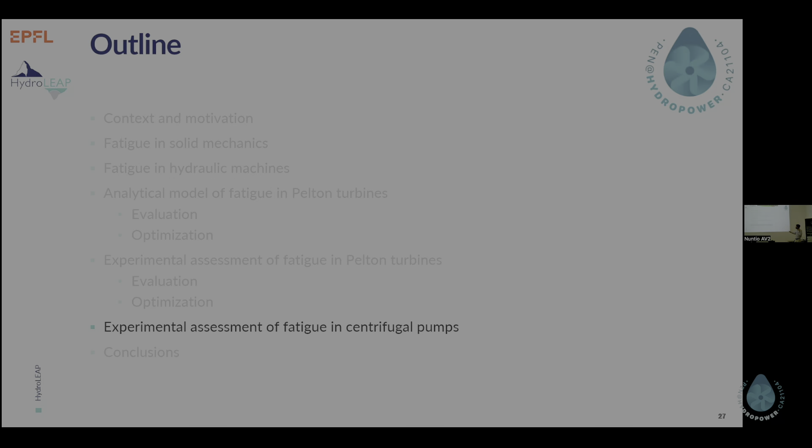We made hypotheses in the beginning about different percentages, but we see that the algorithm is pretty valid. I call it semi-validation because, of course, we are not able to measure the crack we hypothesize exists, but at least with the same theory applied on the steady state regime and then on the transient signal collected from our transient operating condition, this represents the theoretical results of our crack evolving overall.

So that's nice, but for the Pelton turbine—what about the centrifugal pumps? Because we are optimizing for the Pelton turbines, but we don't know what happens for the centrifugal pumps. This experimental assessment is still ongoing at the laboratory. We had our experimental campaign, but the post-processing of the data is still ongoing.

We didn't plan an optimization framework. So basically, we are just evaluating what happens on the centrifugal pumps when we optimize regarding the Pelton turbines. In this case, we are also performing an experimental campaign with a reduced scale model of the multi-stage pump, built up according to the geometry of the real pump storage power plant. And we have instrumentation also on board the impeller.

We instrumented two blades, one on the pressure side and the other on the suction side, to have the same channel — blade number 2, blade number 1, same here. And we placed our strain gauges in the critical location in terms of mechanical stresses, at the intersection between the blades and the crown.

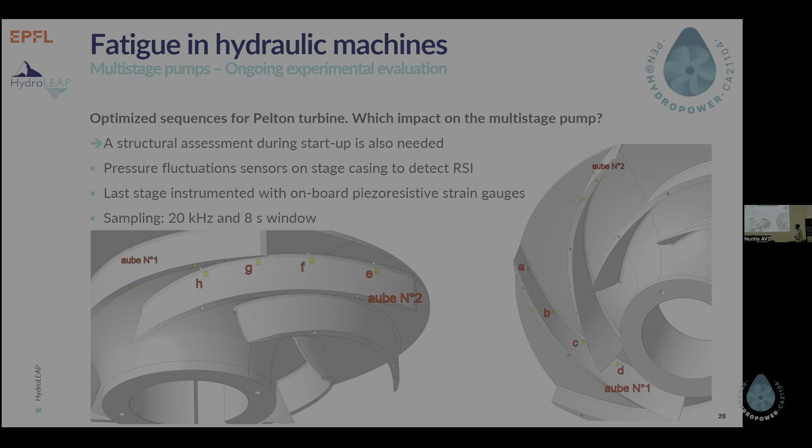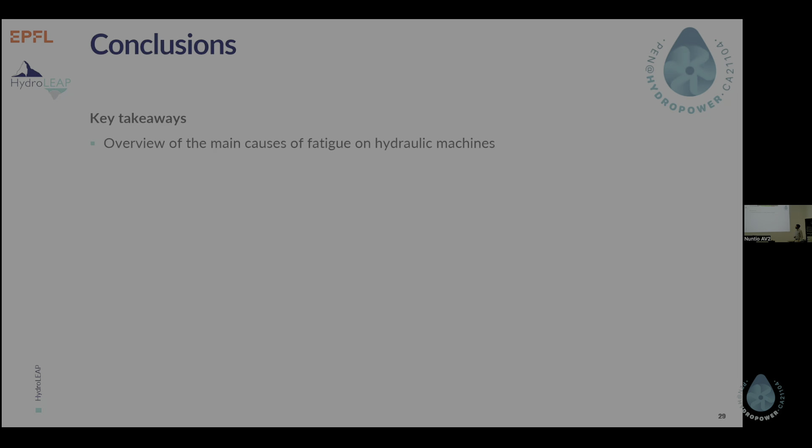The idea is first to evaluate the impact of fatigue if we implement the same sequences we consider optimal for our Pelton turbine, and also, for example, to detect rotor-stator interactions. So we also have pressure fluctuation in the stator, in the casing, and basically we only instrumented the last stage, not the whole run. But still, as I say, this is an ongoing process.

So to conclude, what are the main takeaways from this study? We had an overview of the main causes of fatigue impacting hydraulic machines, in this case only Pelton turbines and centrifugal pumps. And we saw that structural damage can for sure be experimentally assessed on a reduced scale model, but in the case of Pelton turbines it can also be forecasted analytically.

And in this case, for Pelton turbines, we managed to have an enhancement of the operation through an optimization framework in both cases — both from our analytical model used to forecast, and also from the point of view of the experimental assessment.

As I said, this optimal operation can be semi-validated, of course not fully validated because we don't have monitoring of the crack. However, it is crucial that this optimization does not impact the structure of the pumping units in too negative a way. And also, all this analysis I presented is based on very well-known structural hotspots.

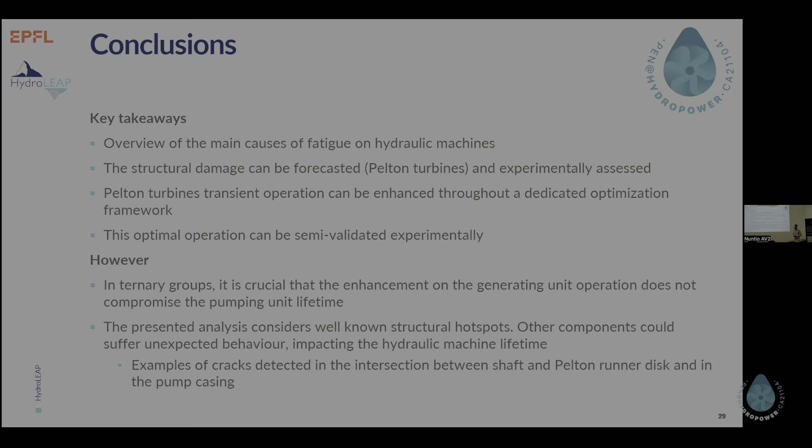So we are optimizing, for example in the case of the Pelton turbine, regarding the bucket root. But the hydraulic machines and also the installation can suffer unexpected behavior impacting other kinds of elements. For example, in the power plants I showed you, we recently had cracks detected in the intersection between the shaft and the Pelton runner, or also in the casing of the pump.

So cracks can happen basically wherever. You can optimize for a single pump, but you cannot necessarily optimize for all the structures involved in the power plant. With this, I finish my presentation. Thank you very much for your attention, and I open it up for your questions.

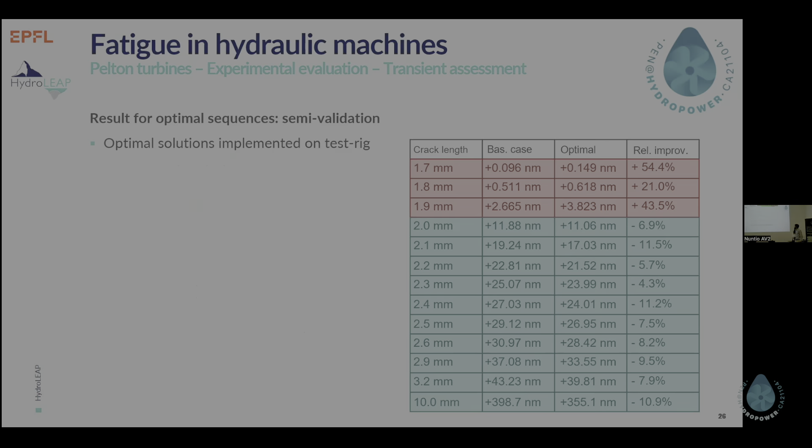Yes. So the decision variables are the two variables that regulate the operating condition of our Pelton turbine: the opening rate of the injector, so the discharge we have, and the rotating speed we have during acceleration. For this case, when we try to minimize the crack length, we also had another parameter, the duration of the sequence, but we didn't use it as a decision variable.

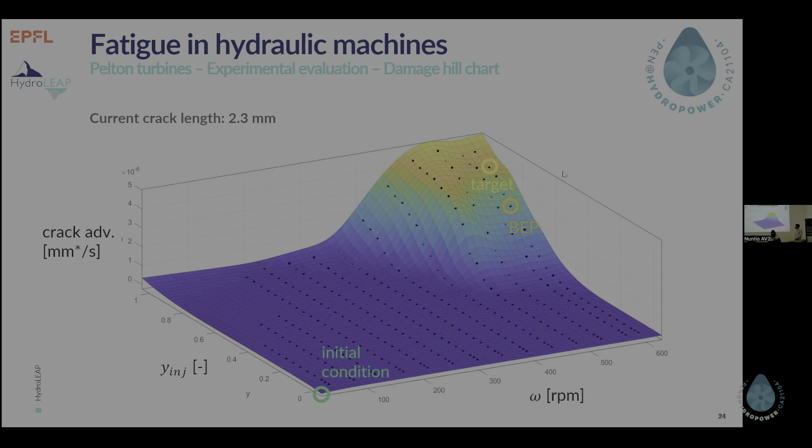Because from the point of view of crack propagation, we have a large zone, as I showed before, with very important regions where basically the propagation is zero. So we cannot really leave the duration of the sequence as a variable, because theoretically we could stay there for at least an hour without propagating anything. So we set it ourselves for different cases — it doesn't enter as a decision variable, but it could also be considered. In our case it was basically rotating speed and the injector opening.